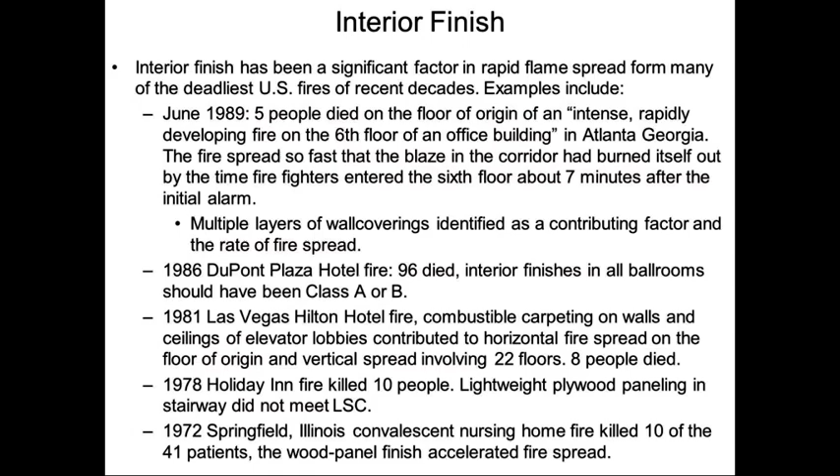In 1972, in a nursing home, 10 of the 41 patients died because of wood paneling, which accelerated the fire spread. So my whole point is, as an interior designer, we have to be very conscious about the finishes that we specify. Wall and ceiling finishes, interior floor finishes, all these are really important, and they're all a part of the interior finishes. Not just your walls and your floors, your ceilings are very important.

Requirements pertaining to interior finishes are intended to restrict the spread of fire over the continuous surface forming the interior portion of a building. So what we're trying to do is not have any particular finish be combustible, and we're also trying to get it to where it doesn't burn. Furnishings, which in some cases may be secured in place for functional reasons, should not be considered as an interior finish. Interior wall and ceiling finishes means the exposed interior surfaces of buildings, including but not limited to fixed or movable walls and partitions, columns, and ceilings.

So how you have to look at it is materials less than 1/28 of an inch thickness applied directly to the surface of the wall or ceiling are not considered an interior finish. That may be things like paint or other items, but if it's over 1/28 of an inch, then it is considered a material that we have to be very careful in specifying. Such materials have surface burning characteristics that are no greater than paper of this thickness applied directly to a non-combustible backing in the same manner.

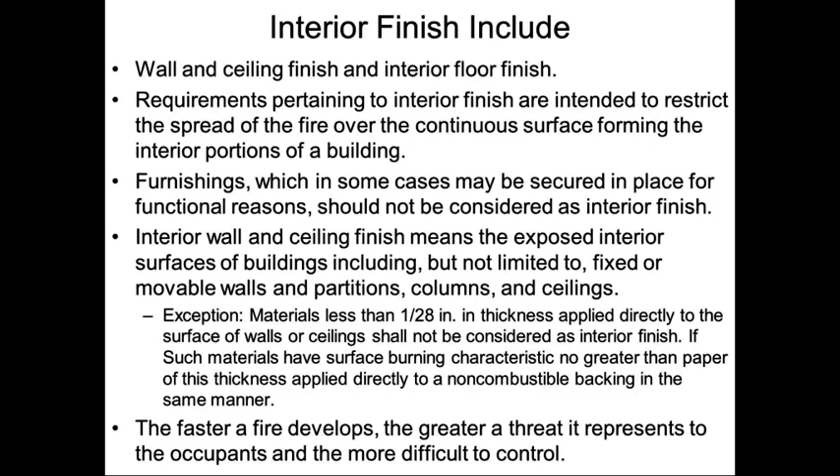The faster a fire develops, the greater a threat it represents to the occupants, the more difficult it is to control, and the harder it is to get people out of the building. Building codes and standards give strict instructions on the selection of these finishes, since finishes often ignite and rapidly spread a fire.

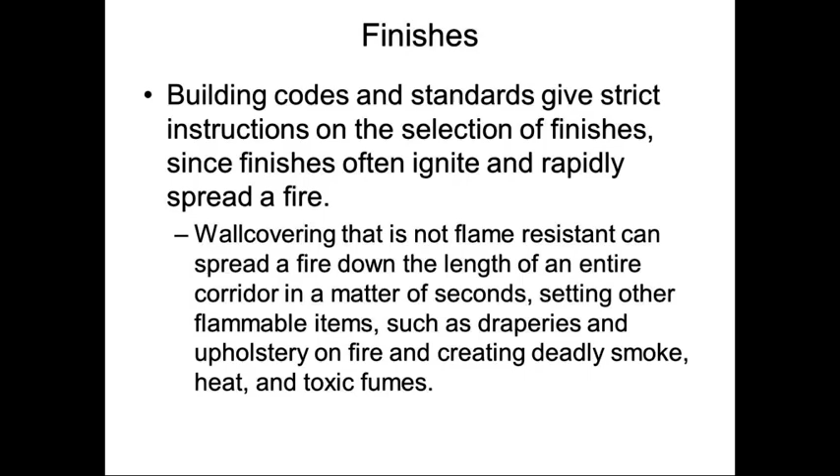Wall covering that is not flame resistant can spread a fire down the length of an entire corridor in a matter of seconds, setting other flammable items such as draperies and upholstery on fire and creating deadly smoke, heat, and toxic fumes. There's been a report of a fire where the carpet was so combustible that it burned the terminal from one end to the other in about 90 seconds. So it was very hard for people to get out of the way on items like this.

Tested building materials are given an hourly rating that represents the amount of time the material can resist a fire. Remember, we've been talking about structural components, 2x4s, what a wall is made out of. But now we're talking about the finishes that are applied to these walls. So finishes and furniture are given fire ratings based on the potential of the material to contribute to the overall fire, to smoke growth, or to the spread of a fire.

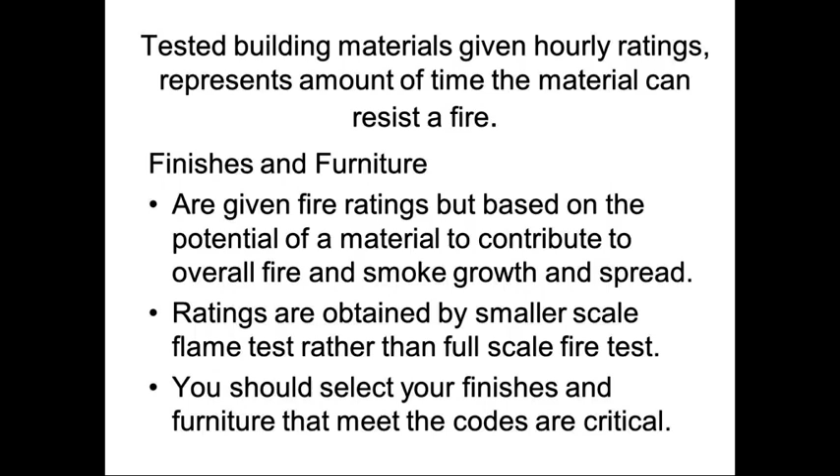Ratings are obtained by smaller scale flame tests, which I'll get into in the next video, rather than full scale fire tests. So a lot of times if you're specifying furniture, you may end up having to have a particular test done on that particular chair or its fabric just to see if it meets that particular code. You should select finishes and furniture that meet the codes; it's very critical on this aspect. Let's go over a few terms.

Terminology used to describe products that are more resistant to fire has changed over the years. Flame-proof is a common term that is usually incorrect, since very few products are totally unaffected by fire. Remember, we talked about certain things that may not burn, but they may char or melt. So the correct terms are flame retardant and flame resistant. So start utilizing those terminologies.

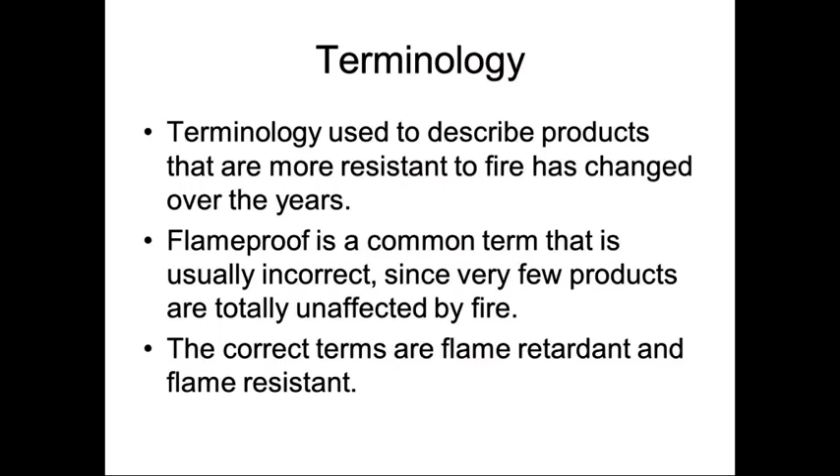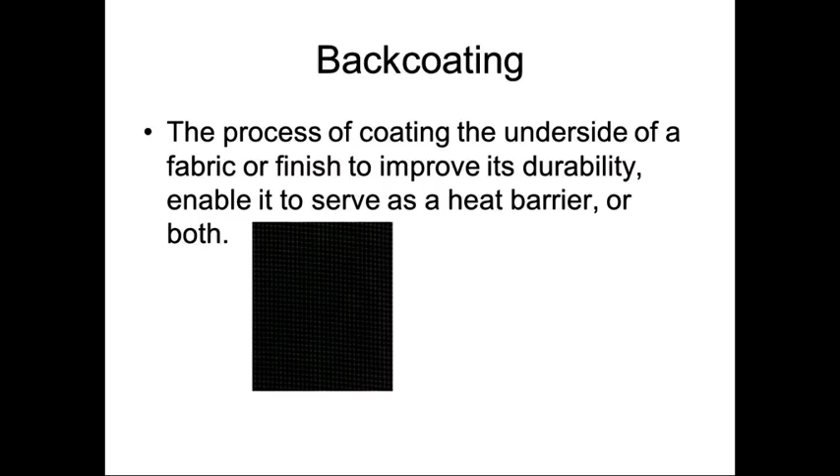There is a process you can apply to upholstered pieces called back coating. It's the process of coating the underside of a fabric or finish to improve its durability, enable it to serve as a heat barrier, or both. So the fabric might burn until it gets to this back coating, but it's not going to let the fire seep into the actual component of the chair; it will stop it. It's called a back coating.

There are other things like fire block, a similar scenario. It's a separate material used behind or underneath the primary finish or other building material for the purpose of creating what is referred to as a fire barrier. I have put some things in here, so you need to look through them and the websites that are on here. Take the time to do that.

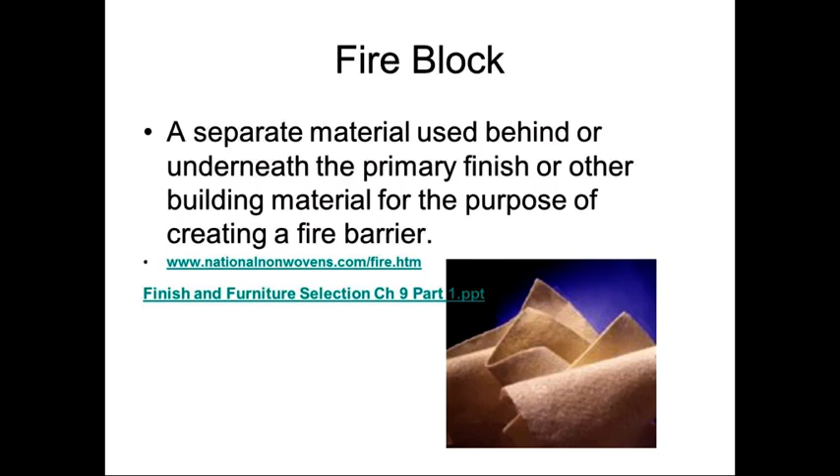Flame resistance. Remember, that's a finish or furniture that restricts the spread of a flame when exposed to a flaming or non-flaming source. It includes resisting the flame or terminating the flame following ignition. So the room may have a fire going on in it, but the actual product is going to be flame resistant. It's not going to contribute to the fire. It might char, but it's not going to combust.

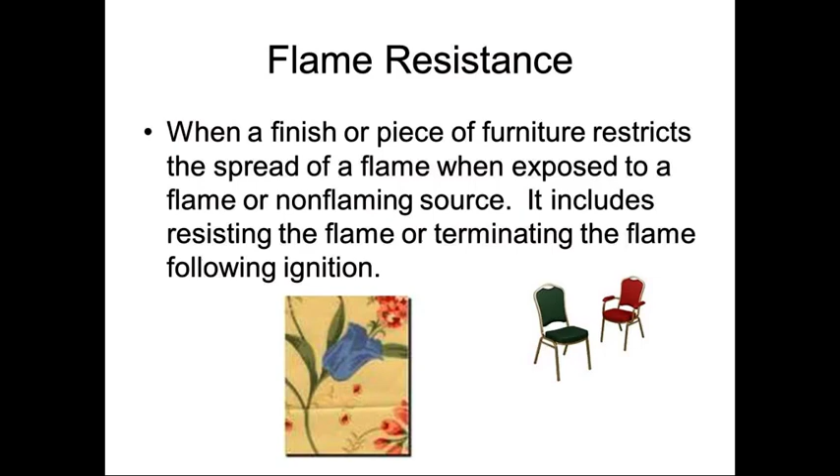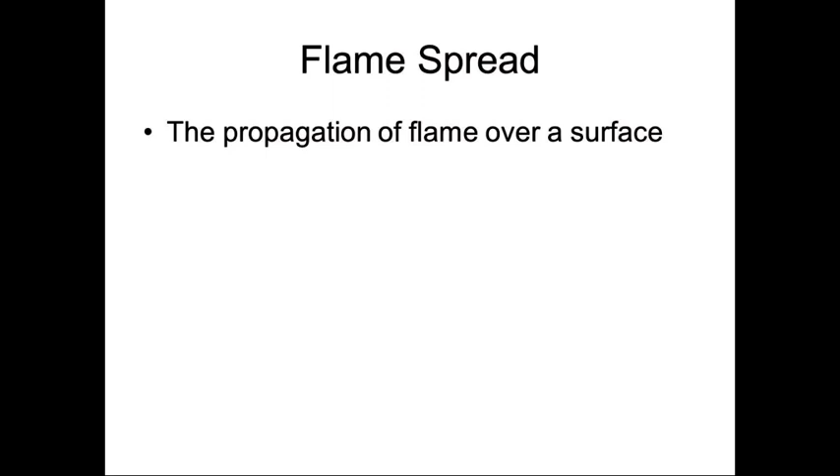Let me back up one, because for the amount of flame spread during that test, you're going to see that different companies rate how quickly the whole chair goes into the combustible stage, or whether it does or not, any drippings that go down on the floor, and how much smoke it generates.

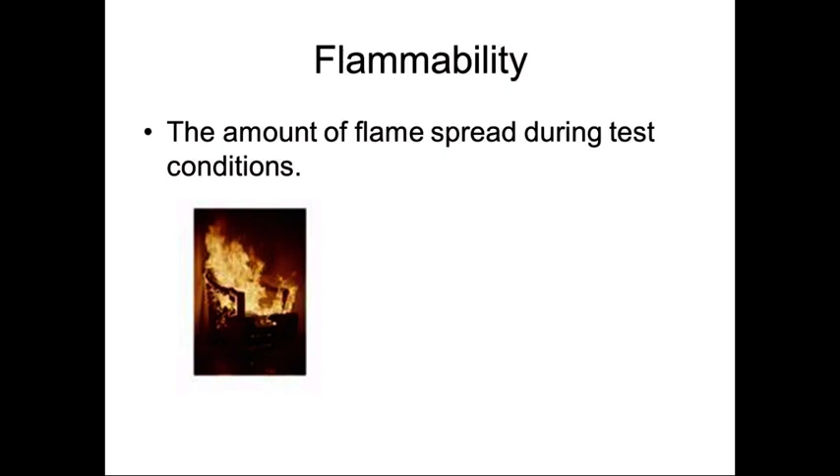There are also other liners that you might see, which act as a heat barrier. It's a liner used between the upholstery and the filling, because a lot of times in a fire, the foam part is what contributes to the fire. So a lot of times they're putting a heat barrier in here to prevent the spread of a flame or smoldering heat.

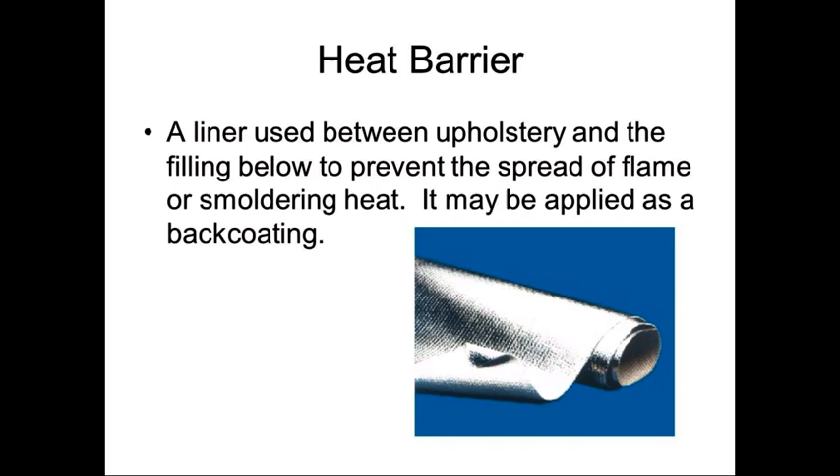It's applied, it's kind of like the back coating. And a lot of times this is kind of the same fabric that you might see on a fireman.

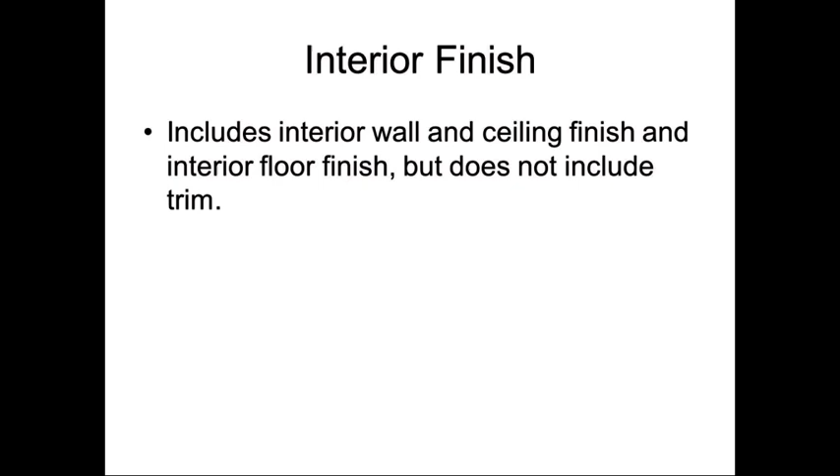So interior finish, that includes wall, ceiling finishes, and floor finishes. It does not include trim. So what is a trim? You know, we've kind of talked about it. Remember, we have baseboards, chair rails, ceiling moldings, trim around your doors. Those are trims, and the interior finish does not dictate that.

So sometimes you may have mock-up furniture, a representation of a finished piece of furniture that utilizes the same frame and the filling and the upholstery as the finished piece. It can be a full or partial mock-up. And so what it's doing is they do testing on a piece. So if a new product of a furniture line has come out, you will see that they will test it.

That's why a lot of furniture companies end up having selected finishes that meet that particular flammability. So if you want to have COM, customer's own material, then you may end up having to send your fabric there so they can do a mock-up or a partial mock-up to see if it's going to meet the same standards that they have already.

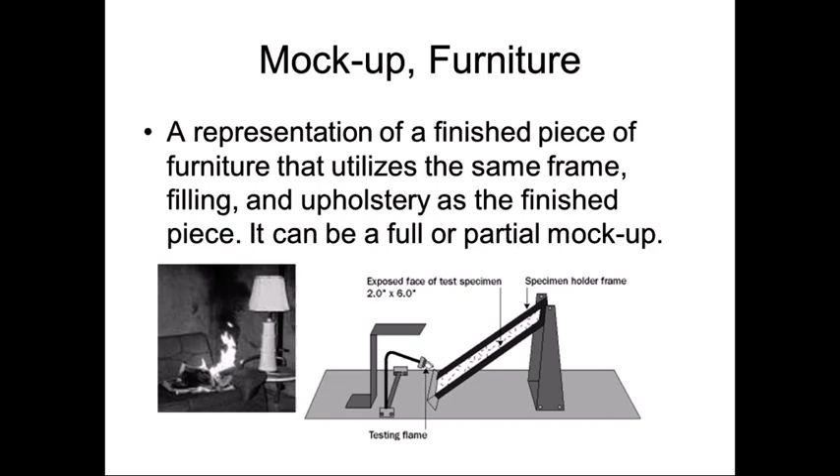Smoldering. That's combustion that occurs without a flame, that generates smoke, toxic gases, and heat. It usually results in a charred area. This kind of came into being especially when we had so many smokers, and people would set their cigarette, go to sleep, and then things would start smoldering in an upholstered chair. And then you would end up seeing the chair totally inflamed, and someone who fell asleep in their chair could, of course, die from the toxic gases of that particular fabric.

Now, remember when I talked about the MGM, that's why so many people died. So if you go back and Google what happened at the MGM, that's because of the upholstery and the vinyl that's used. The toxic gases is what killed everybody, because the booths started burning, and the toxic gases got into the HVAC duct system, and there were no dampers to be able to block it or close it off.

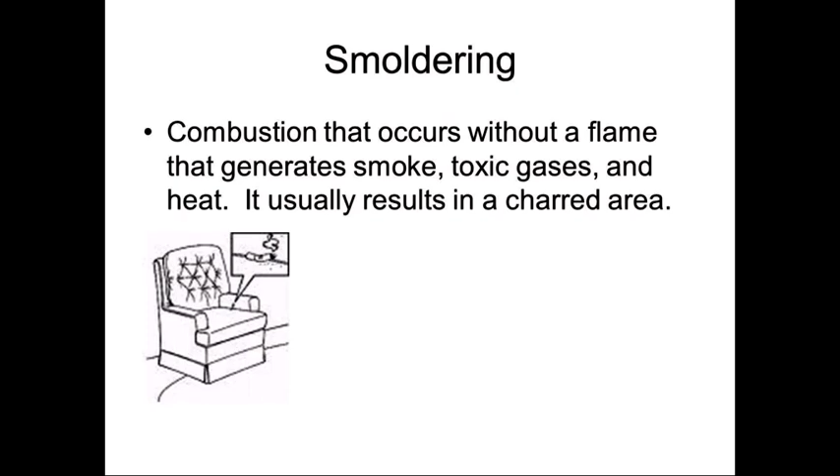So what is a trim? Remember, we talked about picture molds, chair rails, baseboards, handrails, doors, and window frames, and similar decorative or protective materials used, and it's always fixed application, so it's attached to the wall.

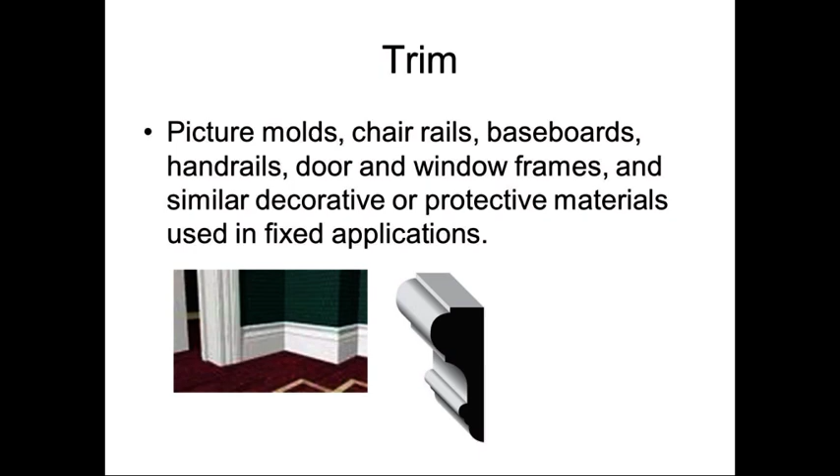So there's different types of finishes and furnishings. Remember, I keep saying there's interior ceiling finishes, there are wall finishes, there are floor finishes, there are window treatments, there's furnishings that have finishes, and there's furniture.

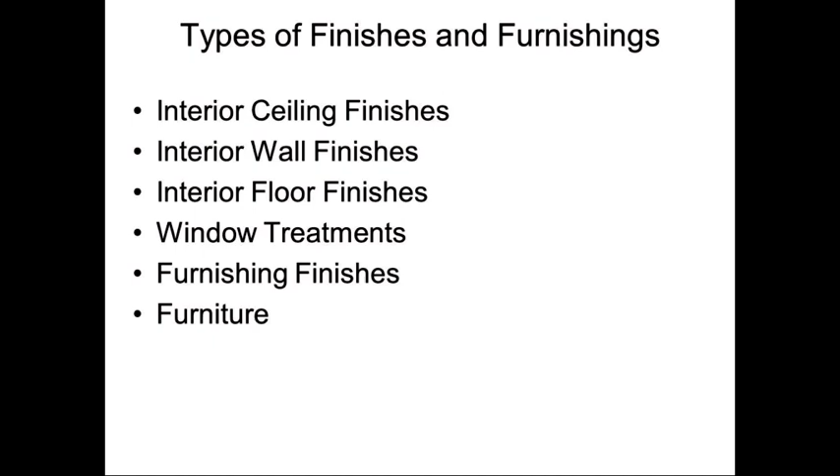So when we talk about interior ceiling finishes, that could be a fixed ceiling that you might see in a residential home, that may have sheetrock or gyp board, and it may be painted. Or you might even have a drop-in ceiling. It's the exposed interior surface of a building, including suspended ceiling grids and coverings that can be applied to fixed and movable ceilings, soffits, beams, space frames, and other similar elements.

If it has to be fire rated, you'll notice the man in the corner there. Those particular tiles have to be clipped in place, because a lot of times there may be a gap at the corner if you look up in a commercial building, and so you've got to clip it in place so that the fire and smoke doesn't seep through the crevices.

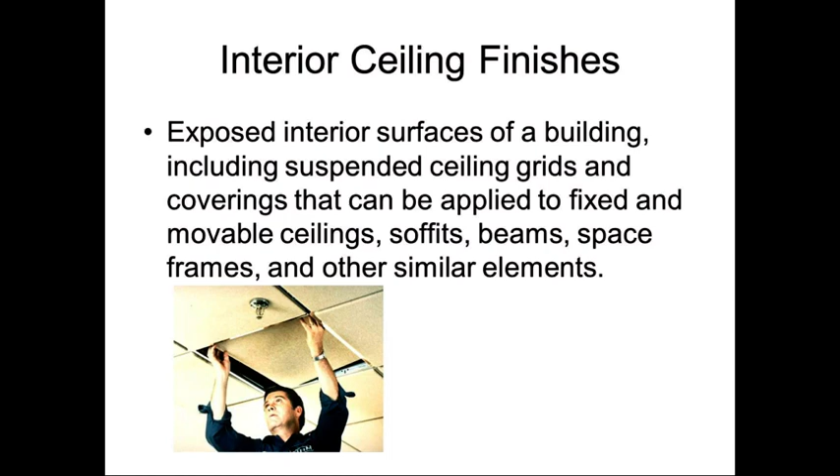Then you have interior wall finishes. Remember, there's all types of finishes that are out there. It's exposed interior surfaces of a building, including coverings that may be applied over fixed or movable walls and partitions, columns, and other similar elements.

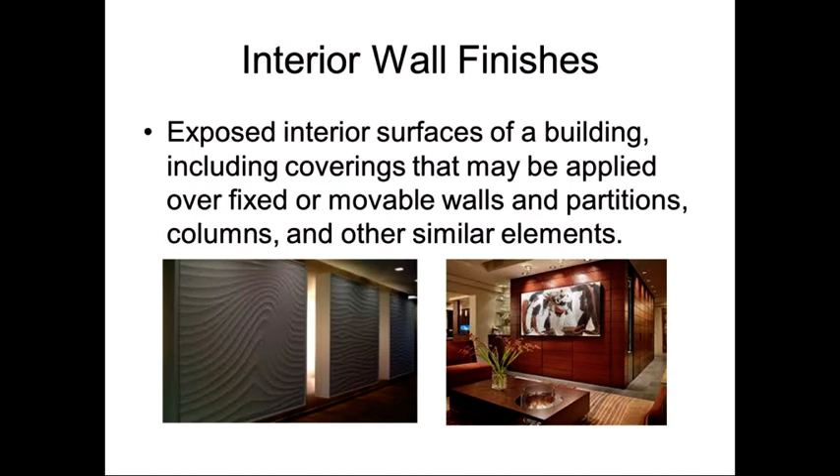Then you have interior floor finishes. Exposed interior surfaces of a building, including coverings that may be applied over finished or unfinished floors, stairs, including risers, ramps, or other similar elements. So you see in the example here a tile floor, wood floor, carpet.

We go up the stairs, we have wood and carpet. We might have resilient type flooring in the kitchen area. So it includes all of those elements that are attached to the subflooring. And that subflooring could be a wood subflooring, or it could be a concrete floor.

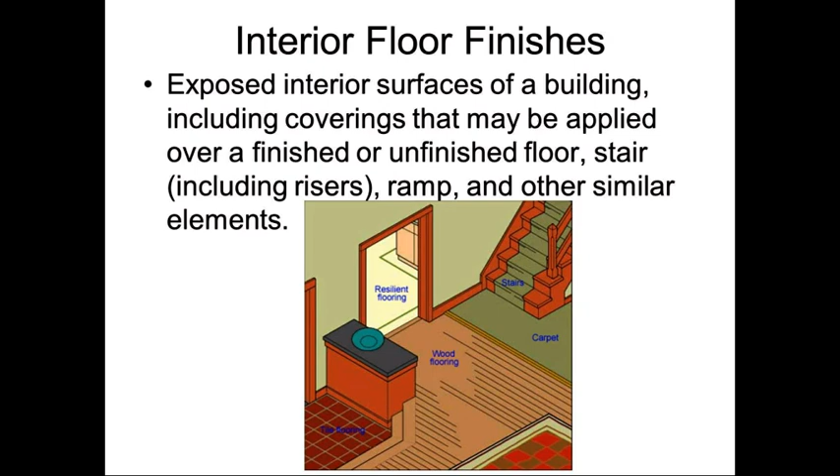Window treatments. Those are decorative elements that control the amount of light from a window area. They include draperies, liners, blinds, shutters. These can be made, remember, of textiles, wood, vinyl, or other similar materials.

If a drapery covers more than 10% of the wall area, it's considered an interior finish by many codes. So if we have a drapery and it goes across the whole wall, then of course it's going to be a wall finish. But if you have one window and it's a small room, and it covers more than 10% of that wall area, length times the width, then it's considered an interior finish.

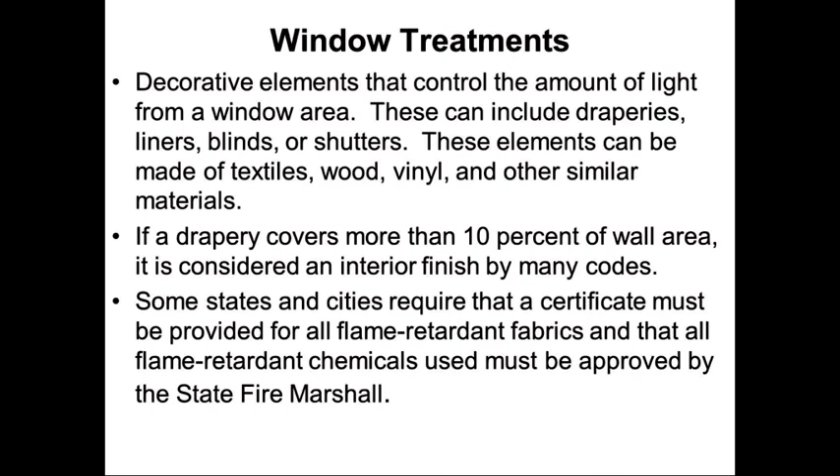Some states and cities require that a certificate must be provided for all flame retardant fabrics that are used, and that all flame retardant chemicals used must be approved by the state fire marshal. So sometimes you will find that you can have fabrics that are not flame retardant, but you can send your fabric off to a company and have a coating put over it, and that flame retardant chemical has to be approved by the state fire marshal. This happens all the time in commercial settings. So these are things that you as an interior designer need to know and can possibly do.

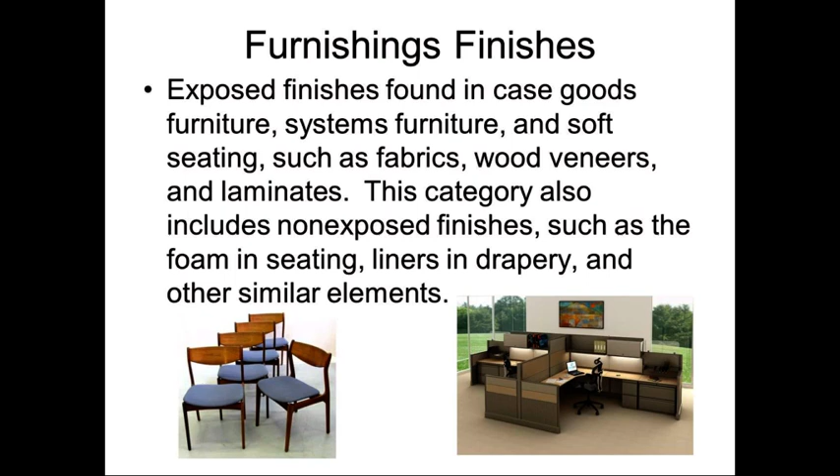Furnishings and finishes. That's, of course, exposed finishes found in case goods, furniture, system furniture, soft seating such as fabrics, wood veneers, and laminates. This category also includes non-exposed finishes such as the foam in the seating, the liners in the drapery, and other similar elements. So these are things that you have to consider. All of these are assembled together, and they have to, of course, be flame resistant.

So we're talking about furniture, whole pieces of furniture rather than separate parts and pieces. This category includes upholstery products such as seating, panel systems, mattresses, which consist of the whole mattress composition, including the fabric, the padding, the coils, and similar bedding assemblies. What goes on top? You've got your sheets, and you've got, of course, the bed linens and your bedspreads.

So to understand, you're going to have different stages of fire development. This is in your textbook, and you need to be aware of that. The first is where it ignites. That's the first stage, the initial growth of a fire. Usually smoke's produced in this stage. It can travel many feet through the room and pose a threat to humans. That's why, remember, smoke rises, and we want to make sure that our activation systems, our fire alarms, will go off.

Stage 2 is the growth stage, when the fire begins to ignite materials. You might have a trash can that's burning, or the Christmas tree that's burning, and all of a sudden the furniture and the finishes right next to it start getting consumed in the fire. So it's a large part of the room. Heat is generated, and when you get all this heat, it's called a flashover. That's when a fire reaches at least 1200 degrees, and in one room it's going to flash over into another room because that heat has built up so much, it's got to go somewhere else.

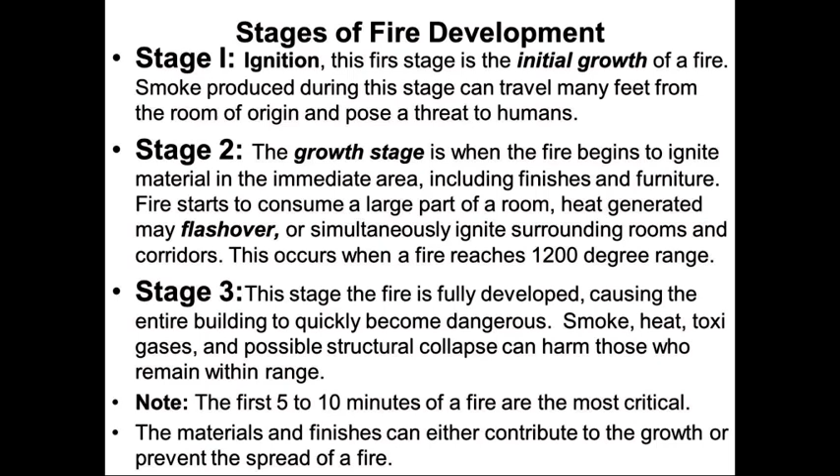Stage 3 is when the fire is fully developed, causing the entire building to quickly become dangerous. There's smoke, heat, toxic gases, possible structural collapse, and harm to those who remain within range. A lot of people say that will take a while, but the first 5 to 10 minutes of a fire are the most critical, and materials and finishes can either contribute to the growth or prevent the spread of the fire. So that's where we as interior designers come into play. So this is the development of fire.